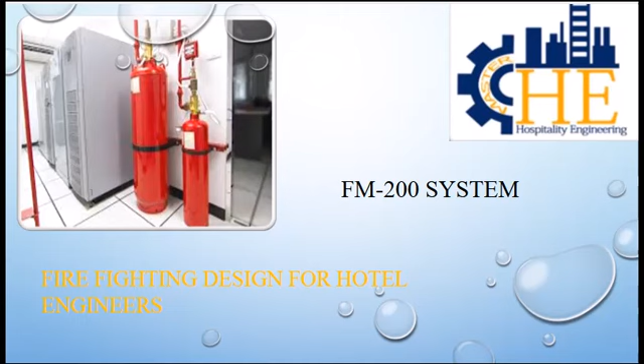Welcome to our course on FM-200 fire suppression systems. In this session, we will explore the features and benefits of FM-200 as a fire suppression agent. Understanding the role of FM-200 is crucial for effective fire safety management. We will cover its mechanism, components, and best practices for implementation. Let's begin our discussion on FM-200 systems.

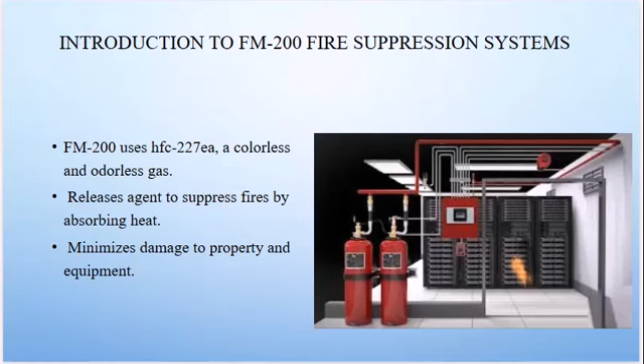FM-200 uses HFC-227EA, a colorless and odorless gas for fire suppression. It releases the agent to suppress fires by absorbing heat, minimizing damage to property. Understanding its function is critical for effective fire management. Regular assessments ensure that FM-200 systems are operational when needed. Effective use of FM-200 can enhance overall fire safety.

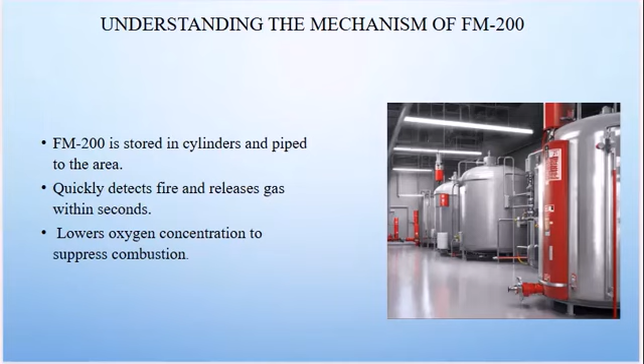Understanding the mechanism of FM-200: it is stored in cylinders and piped to the protected area. The system quickly detects fire and releases gas within seconds. It lowers oxygen concentration to suppress combustion effectively. Understanding this mechanism is vital for the safe operation of FM-200 systems. Regular training ensures personnel know how to handle FM-200 effectively.

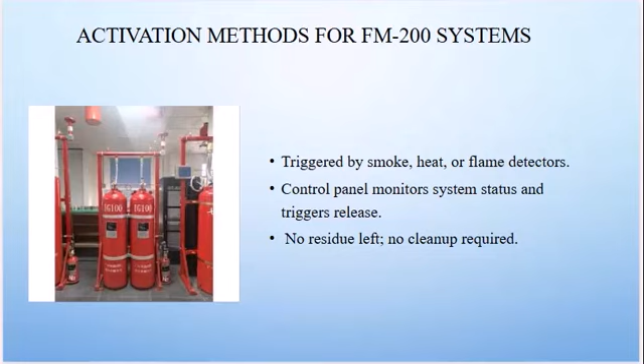Activation methods for FM-200 systems: these systems can be triggered by smoke, heat, or flame detectors. The control panel monitors system status and triggers the release of the agent. One key benefit is that no residue is left, eliminating cleanup requirements. Understanding activation methods supports effective fire management. Regular checks ensure that detection systems function properly.

Key components of the FM-200 system include storage containers, a piping network, and nozzles. These components work together to distribute gas to protected areas. Understanding the components enhances overall system reliability. Regular inspections ensure that all components are functional and well maintained. Training staff on component specifications supports effective fire management.

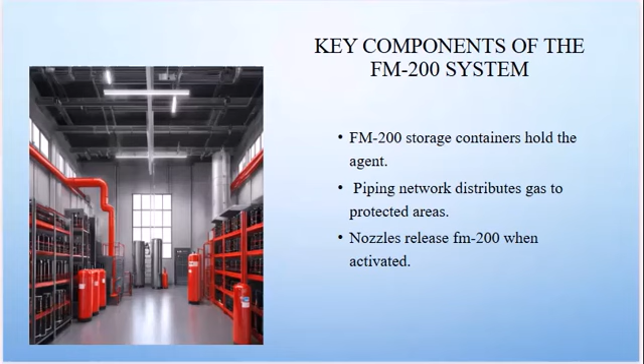Overview of the detection system: it includes smoke and heat detectors that signal the control panel to release FM-200. Understanding the importance of this system is critical for effective fire safety. Regular assessments ensure that the detection system is operational. Training personnel on detection protocols enhances overall safety measures. Effective detection is essential for rapid response in emergencies.

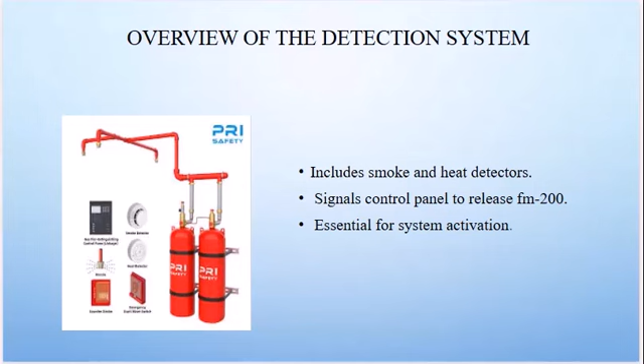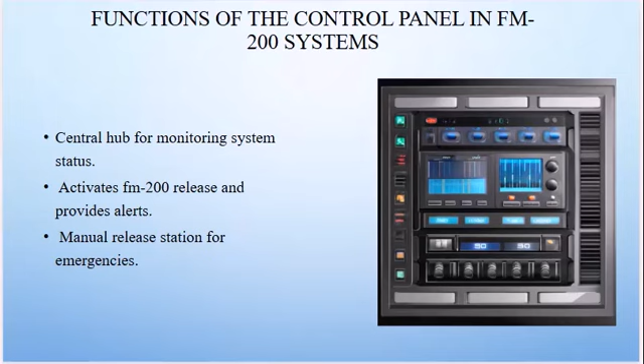Functions of the control panel in FM-200 systems: it serves as the central hub for monitoring system status. It activates FM-200 release and provides alerts during emergencies. A manual release station is available for immediate action in urgent situations. Understanding the control panel's functions supports effective fire management. Regular checks ensure that the control panel operates correctly.

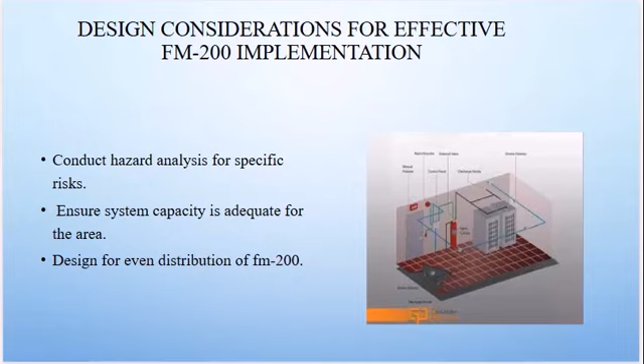Design considerations for effective FM-200 implementation: conducting a hazard analysis for specific risks is crucial for effective design. Ensure that system capacity is adequate for the protected area. Design should facilitate even distribution of FM-200 throughout the space. Understanding these considerations enhances overall system effectiveness. Regular evaluations ensure that design specifications are met.

Benefits of utilizing FM-200 in fire protection: it offers fast and effective fire suppression capabilities. It is safe for occupants, requiring minimal cleanup after discharge. The system is environmentally friendly and provides design flexibility. Understanding these benefits supports effective fire safety planning. Regular training ensures personnel are familiar with FM-200 advantages.

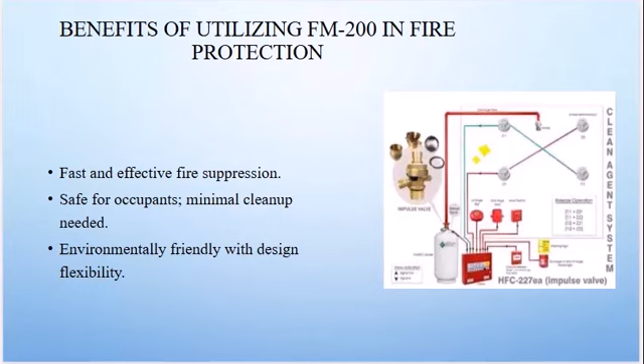Limitations and challenges of FM-200 systems: they are limited to enclosed spaces and are not suitable for open areas. They can incur high installation and maintenance costs. Periodic recharge is necessary for continued effectiveness. Understanding these limitations supports effective fire management. Regular assessments ensure that personnel are aware of system challenges.

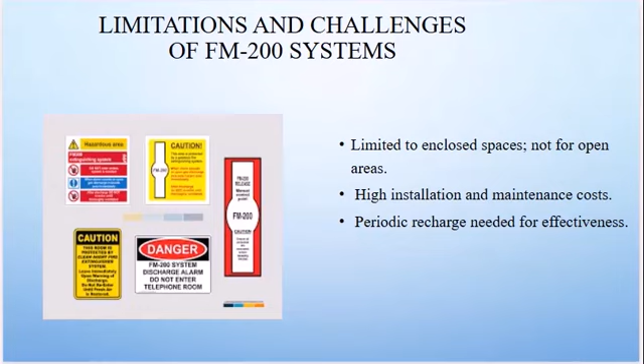Safety considerations when using FM-200: it can displace oxygen, making proper design crucial for safety. Compliance with regulations is necessary to avoid penalties. Trained personnel are required for operation and maintenance to ensure safety. Understanding safety considerations enhances overall fire safety management. Regular training ensures awareness of safety protocols.

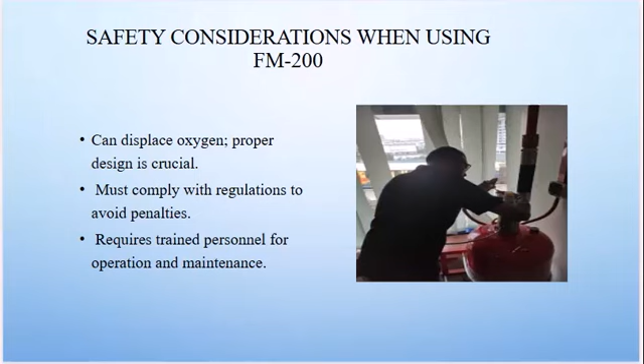Environmental considerations of FM-200 usage: it has low toxicity but a high global warming potential. Proper disposal is necessary to prevent environmental contamination. Consideration of alternatives with lower environmental impact is essential. Understanding environmental considerations supports effective fire safety planning.

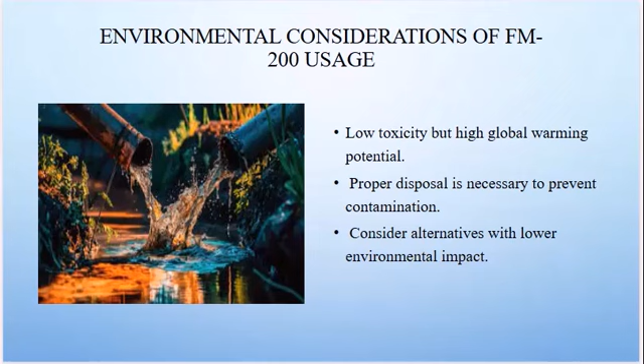Regular assessments ensure compliance with environmental regulations. Safety protocols for operating FM-200 systems require that only authorized personnel operate these systems.

Ensure air quality is safe before re-entry after discharge, and display warning signs in protected areas to inform occupants. Understanding safety protocols enhances overall fire safety management, and regular training ensures compliance with safety measures.

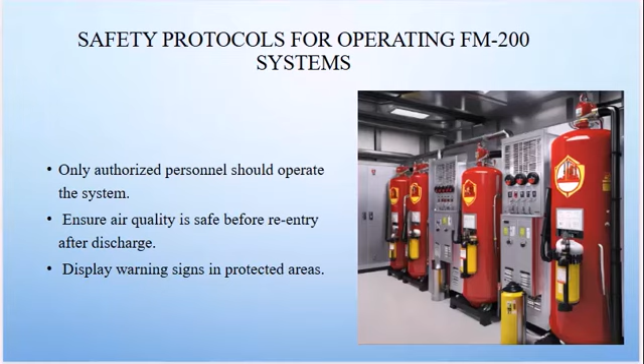Future innovations in FM-200 technology include integration with building automation for better monitoring. Improved detection technologies are being developed for faster response, and research is ongoing for alternative agents with lower environmental impact. Understanding these innovations supports effective fire safety planning.

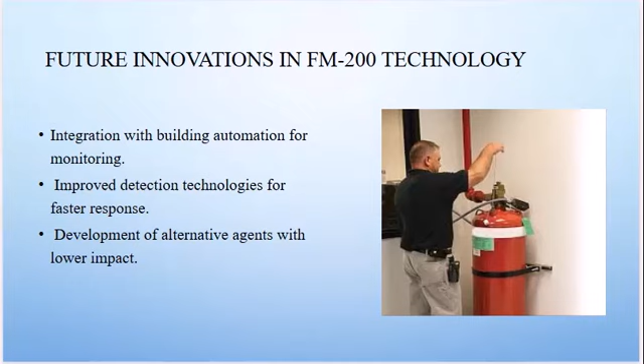Regular assessments ensure that systems remain up to date with advancements. Criteria for selecting FM-200 systems: when selecting FM-200 systems, use approved materials per standards.

Ensure that components are sourced from a single manufacturer for compatibility. Compliance with local regulations is essential for effective fire management. Understanding selection criteria enhances overall safety measures, and regular evaluations ensure that systems meet required standards.

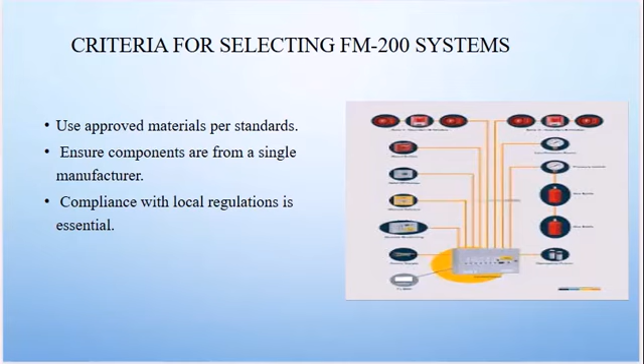Designing FM-200 systems for specific applications requires consulting licensed fire protection engineers. Consider building size, occupancy, and materials for effective implementation. Design must meet fire safety requirements specific to the environment. Understanding design considerations enhances overall safety measures.

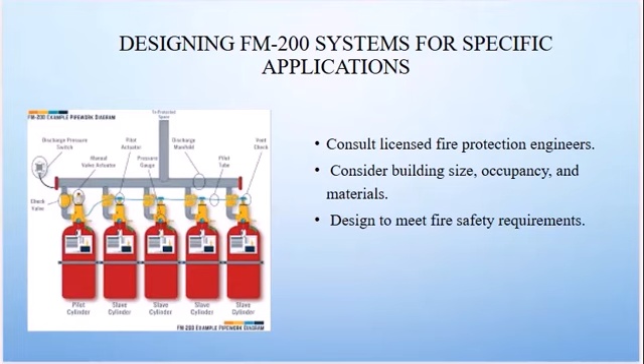Regular assessments ensure compliance with fire safety regulations. Installation procedures for FM-200 systems involve running pipes and installing nozzles throughout the building.

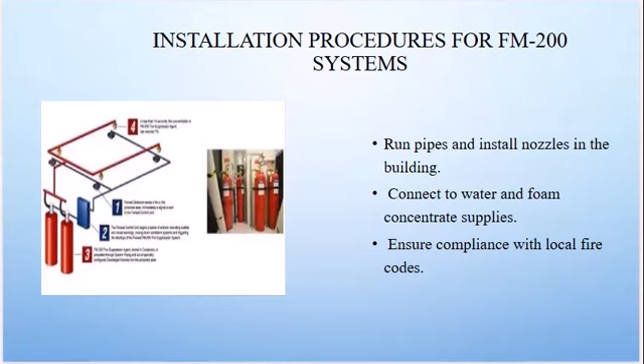Connect systems to water and foam concentrate supplies as necessary. Ensure compliance with local fire codes during installation. Understanding installation procedures supports effective fire management, and regular evaluations ensure proper installation practices are followed.

Proportioning techniques for FM-200 applications include balanced pressure and inline proportioning methods, which are essential for effective applications. Bladder tank systems facilitate effective mixing for fire suppression.

Batch mixing may be used for portable applications. Understanding proportioning techniques enhances overall system effectiveness, and regular assessments ensure that mixing methods are appropriate.

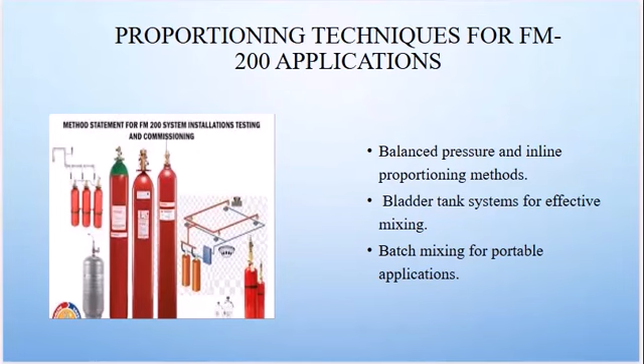System testing and validation for FM-200 involves conducting flow and functional tests after installation to ensure system effectiveness, and verifying that all components activate as intended during testing.

Obtain approval from local authorities for compliance. Understanding testing protocols supports effective fire safety management, and regular evaluations ensure systems are maintained for readiness.

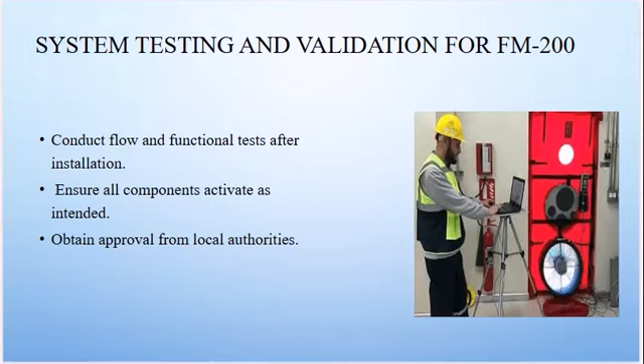Maintenance requirements for FM-200 systems include regular inspections and testing, which are necessary for system reliability. Keep records of maintenance activities to ensure compliance.

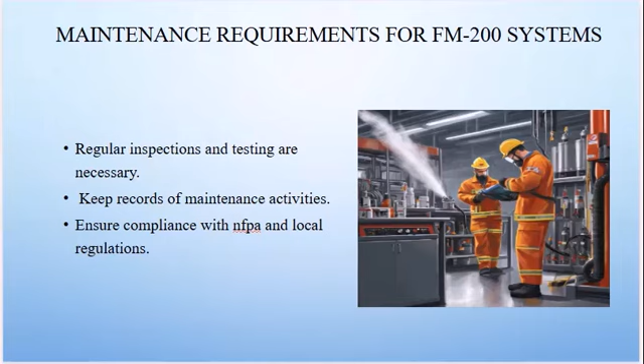Understanding maintenance requirements enhances overall fire safety. Regular assessments ensure that systems remain operational, and training personnel on maintenance procedures supports effective management.

Training personnel on FM-200 operations means personnel must be trained on system operation and emergency response procedures. Conduct drills to ensure preparedness and familiarity with the system.

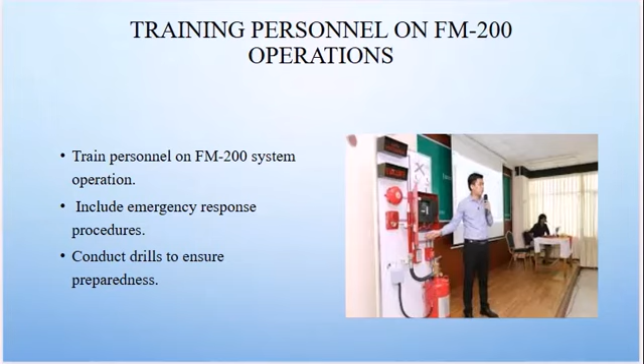Understanding training requirements supports effective fire management. Regular training sessions enhance overall safety measures, and commitment to training contributes to successful firefighting efforts.

Documentation practices for FM-200 systems require maintaining records of inspections, incidents, and repairs for compliance. Documenting maintenance activities is essential for operational readiness. Understanding documentation practices supports effective fire safety management.

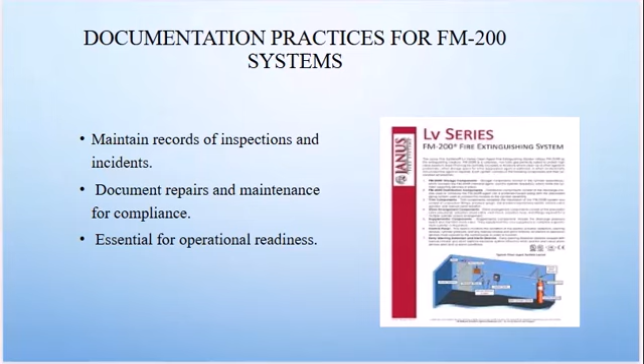Regular assessments ensure that records are accurate and up to date. Effective documentation contributes to overall system reliability.

Addressing challenges in FM-200 implementation: challenges include high initial costs and maintenance demands. There is potential for false alarms and system failures in some cases. The complexity of systems requires specialized training for operators.

Understanding these challenges supports effective fire management. Regular evaluations ensure that challenges are addressed proactively.

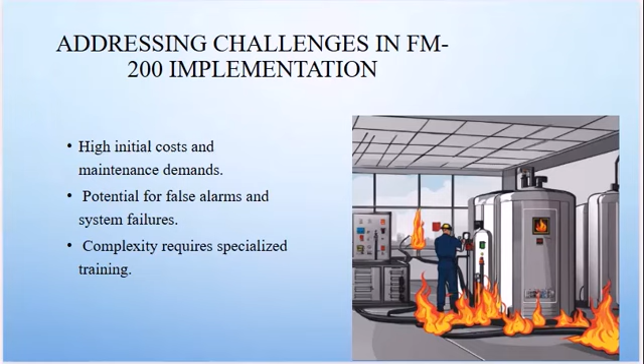Evaluating the environmental impact of FM-200 usage on global warming potential. Explore alternatives with lower impacts to enhance sustainability, and ensure proper disposal methods to minimize environmental risks.

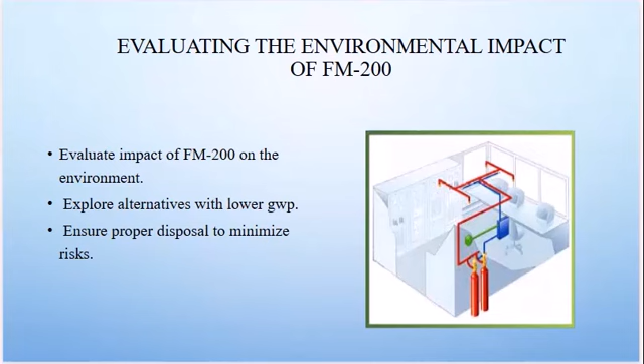Understanding environmental evaluation supports effective fire safety planning. Regular assessments ensure compliance with environmental standards. In conclusion, we consider the effectiveness of FM-200 systems in fire safety.

FM-200 systems are reliable for enclosed spaces, offering rapid fire suppression. They minimize damage to property and equipment during incidents. Ongoing advancements in technology improve performance and safety.

Understanding the effectiveness of FM-200 supports effective fire management. Commitment to FM-200 systems enhances overall fire safety measures.